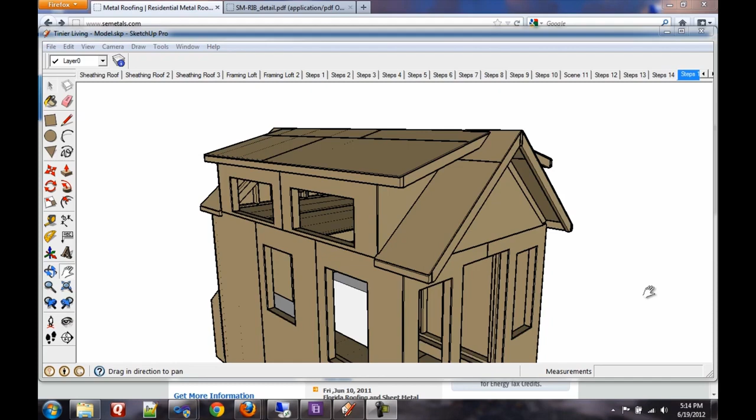I deal with generally two different manufacturers: one down in Florida who has a great online resource, and one up in Atlanta that doesn't really have anything online, just pamphlets they can give me, but I have to go to the store to get those. I'd much rather go to a website and see what I need there. Even though the manufacturer up in Atlanta doesn't provide an online website, I can still use the Florida one, just because things are so similar.

So if you can't find resources for your manufacturer online, I recommend going to one of the websites I use. One of the suppliers I use is Semco Southeastern Metals, at semetals.com. They're a roof supplier, and they have a lot of literature out there on the different products they have. If you click on the literature button on their website, it takes you to a page with all the different pamphlets for all the different products, and there are several different types of panels they sell that have different profiles.

Since I'm not going to be actually buying their product, I found the profile of a product they sell that's extremely similar to what I'll be buying, called the SM Rib Detail Manual. This manual has a bunch of great information, and one of the things I like best is they've got an illustration of a house showing all the different components, where they fit into the roof, and the names of them. Having this information and mapping this model to your house, you can really find out what pieces you're going to need, and it'll allow you to be a little more educated when you go to order your roof from your manufacturer.

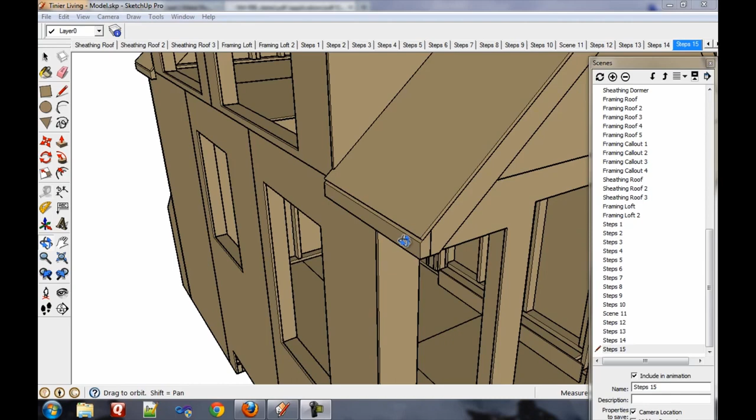Now, the first piece of the roof that we're going to need to install and order is what's called drip edge. Drip edge goes along the bottom edge of your roof, and what it does is protect the fascia board. As water runs down and comes off the panel, you don't want that water running down your fascia board. If the fascia board stays wet, it may start to rot, and it'll definitely start to look bad as it gets dark and moldy. So the drip edge covers that up, and at the bottom of the drip edge it has a little lip. Here's an illustration - number one, we've got the drip edge going along the bottom edge of your roof.

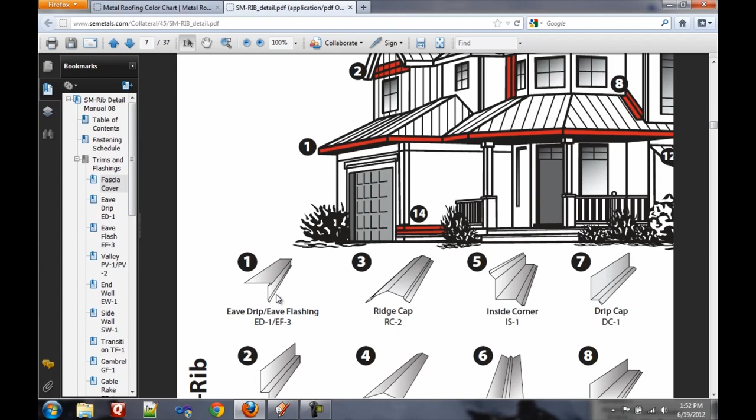You can see here it's got a little bit of a lip at the bottom, so as the water runs down, where it's not running on your fascia board, as it comes off that piece there's a little bit of a kick out, and that water gets kicked out and falls safely away from the fascia board. So a lot of the water will miss the fascia board.

If we scroll down and look at the actual profile of the piece, this profile is for the fascia cover piece. But this picture is a little bit better than the picture for the actual drip edge. You can see here we've got a little bit of a kick out, and then it also has a little bit of a ledge up here.

Now, this is not the same between different manufacturers, you may get a different profile. From the company that I order from, I don't get this little bit of a ledge. But this is the one I'm more concerned about, because the roof panels are going to hang over this, not end directly at the end of the drip edge. So I don't feel like this little lip is as important, since the panels themselves will provide that for you. But this other lip obviously is important.

Another thing to be aware of when you order this: if we look back here, you can see there's an angle. This part is perpendicular to the ground, but this piece of the drip edge mimics the angle of the roof. So when you order this, you really need to specify what angle you want it spread at - this is not a 90 degree angle. If you order it without specifying, very likely you're going to get a piece that they just bend to 90 degrees.

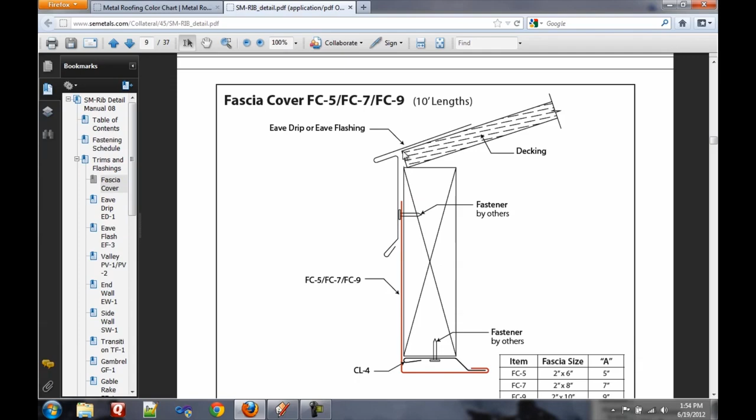Now you can bend this wider once you get it - it's fairly thin metal, but because this piece isn't very big, just a couple inches by a couple inches, it doesn't bend very easily. What I've done is put it in place, then push down on it, and by pushing down you'll start to spread it open. Then you can nail it down quickly and it'll hold in place, especially once you get the panels on. But it's kind of a pain to work with if it's not at the angle you need. So you'll definitely want to specify an angle if you can.

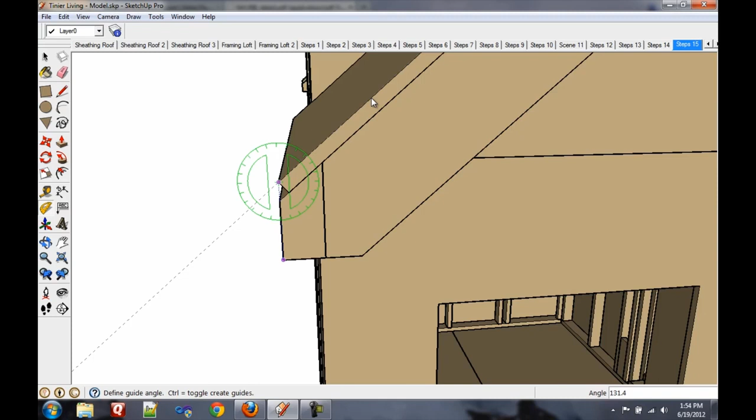In this particular example, if I look at this roof - you can do this once the house is built, take a speed square and do the measurement, or if you have the plans, you can do it this way. I'm going to take the angle measurement... and at the bottom right there, you may not be able to see it, but it's 131 degrees. So I would order these pieces to be 131 degrees.

Now, because of this roof design, I actually have two different angles. I've got an angle up here - this roof is not as steep, and that measurement is 105 degrees. So the pieces I'd order for up here would be 105 degrees, and the pieces down here would be 130 degrees approximately.

Now this section right here is 2 foot, but I also want a little bit of extra material to play around with, because I'm going to bend it around the side. I'm going to cut it, and when we get to the installation you'll see what I mean. So I don't want to order just for a 2 foot piece - whenever there's an end, I want to order a little bit extra so I can wrap it around, about 3 inches on either side.

So this section right here I'd order as a 2.5 foot section, and I've got 4 of these, so that works out to 10 feet. The trim pieces come in 10 foot sections, which works out really well - I only have to order 1 piece. Now be aware these trim pieces are pretty inexpensive - I think a 10 foot trim piece of drip edge cost me about $2.50. So it may be a little wasteful to order an extra piece, you may end up throwing some of it away, but this is the very first piece.

You cannot proceed without putting the drip edge on, because everything goes on top of that. So if you were to only order 1 piece and you made a mistake, especially since it's the first piece you'll be installing, the first time you'll be playing with metal, you may make a mistake, and then the entire roof job will be halted. So for the $2.50, you may consider ordering an extra piece. Just be aware that you may just end up just throwing it away.

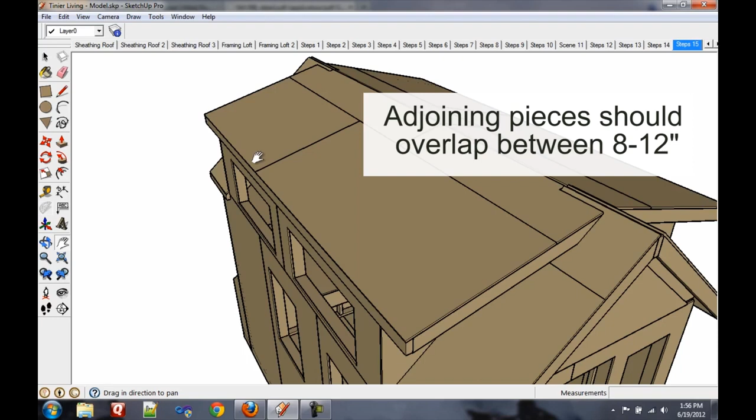Now, if for this section, this is a 12 foot span, so a 10 foot piece isn't going to cover it. So I need 10 feet and then a 2 foot piece. But on this side, I need the same thing. So what I can do is just order 2 10 foot pieces and then a third 10 foot piece that I'll share between both sides. So I'll need a total of 3 10 foot pieces with 105 degrees. And I've got a little bit of playroom there, it's not super tight on the amount that I'm using.

But for this, since it's just the right amount, I would go ahead and order 2 10 foot lengths at 131 degrees.

Now the next part that we'll be installing are the roof panels themselves. Now the roof panels go over the drip edge, but almost every other piece in the roof goes on top of the roof panels. As you can see in my design, I actually need 2 different sized panels. I need a longer panel for this steeper roof, and then I need a shorter panel for up here.

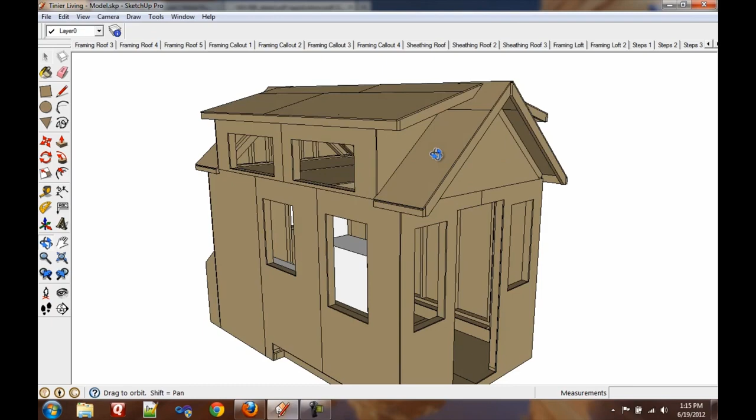Now you should read the specifications for the panels that you're buying, because they usually specify how far over the edge of the roof the panel should extend. So what you'll need to do is decide how long to order the panels. Let's look at this longer panel. If I take my tape measure and go up to almost the peak, and bring down, I've got 5 foot 4 inches that I need to order for this panel.

But then I also have to account for the fascia board, which will be a 1/2 inch, and I also have to account for the fact that they recommend the panel extending 1 inch beyond the edge of the roof. So I'd actually add on 1.5 inches onto this length.

Now, if you're not exact, it doesn't have to be exact to the 1/2 inch, because the ridge cap that you're going to be putting on will extend down the roof, probably 4 to 6 inches on either side of it. So if you're off by an inch, it'll still be covered up, you'll be fine.

But also, if you cut it a little bit too long, if you order it a little bit too long, you can cut it back a little bit. I've done that before, expecting just to be careful, order it a little bit long. But then I was kind of disappointed because I ended up having to cut every one of my pieces, and cutting them across the ridges is a little bit more challenging than cutting it lengthwise, because going over the ridges, it's hard to take snips and cut over the ridges. So I ended up having to take a grinder to grind that off.

So if you look here, here's an illustration of one of the panels. Now these panels are about a little bit over 3 feet wide, and I say over because they actually overlap each other to make a seal. So when they're overlapped, they end up being, as you add on, 3 panels make 9 feet, a little bit over 9 feet, and 2 panels make a little bit over 6 feet. So they're actually just a little bit beyond 3 feet, so that when they're overlapped, they still make a total of 3 feet.

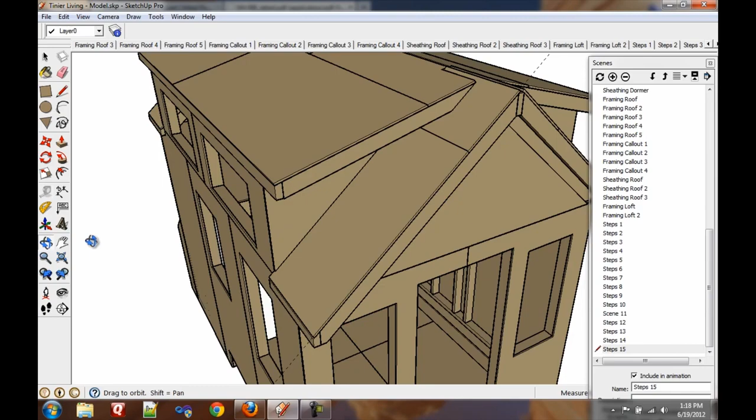It's safe to avoid the seams, so I'd go ahead and spend the money to get 4 different panels, so you can have 4 continuous panels on all these sections if you had a roof like this. Now on this section, I know it's about 12 feet wide, so in that case I would have 4 panels.

Now you're getting pretty close to being right on the edge, and I don't like the idea of not having any room to play. You might end up having to shift these panels over up to 6 inches, and I'll explain why in a bit. But if you have a 12-foot roof and can fit exactly 4 panels, I'd really recommend getting a 5th panel for this section as well, because if you have to shift them, you may not have enough room.

The reason you might have to shift them is, later on, I'll be explaining what Gable rake is. But when you put Gable rake on, let me go back to this display. So this is the profile of the piece. The Gable rake has to make contact in one of these valleys. It can't make contact on one of these hills in the profile of this piece. It has to be in a valley.

So it's easy to line up the first piece, but when you put all the panels together, you have to make sure that when you lined up the first piece, you didn't sabotage yourself to where the Gable rake on the completely opposite end of the roof is now going to lie on one of the hills. I've done that before, where I'll install the first panel, it'll look perfect, I'll make my way down, and then all of a sudden I get to the very other end, and lo and behold, my Gable rake is landing on a hill in this profile.

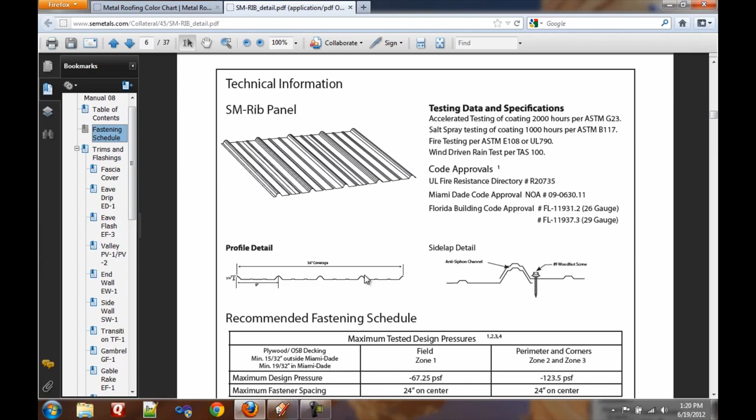And that can't be, it just won't work that way. So I've had to go and take out every one of my panels and shift them by an inch and a half or 2 inches, just so the Gable rake doesn't lie on one of these hills on either end of it.

So once again, for this particular roof, in this design, and obviously your design would be different, I'm going to order a total of 4 of the longer panels, and a total of 10 of these shorter panels.

Now the next part we'll talk about is the Gable rake. The Gable rake is similar to the drip edge we talked about, but this goes along the edge of the roof on a gable end, and it covers up a little bit of the fascia board. Another big difference between the drip edge and the Gable rake is the Gable rake goes on top of the roof material, but it still covers up a little bit of the fascia board, and also has the kick out that allows the drip to drip away from the fascia board.

So here's a profile of a piece of Gable rake, and as I just said, the Gable rake, when it comes in contact with the roof, has to be in a valley. It can't be up here - it will just look really weird if it's pushed up like that. So you have to make sure that on both ends of your wall, the Gable rake is going to fall into a valley.

I can't tell you this enough, because it's a major pain to go back and pull up all this roof. Now as I said, we've got a little bit of a kick out, and because it's on the side, we have to put a screw into it to secure it. You can see here that the roof material doesn't actually go to the end - there's a little bit of a pocket in here, and we're going to put some butyl sealant tape on here, and I'll talk about that in a little while.

So this will be protected. You've got it secured down at the bottom, and you've got it over a valley. You've got the tape here, but even if you didn't have the tape, assuming there's a hump here, the water would very unlikely get in here. So this area is pretty protected, and you have a little bit of room to shift it.

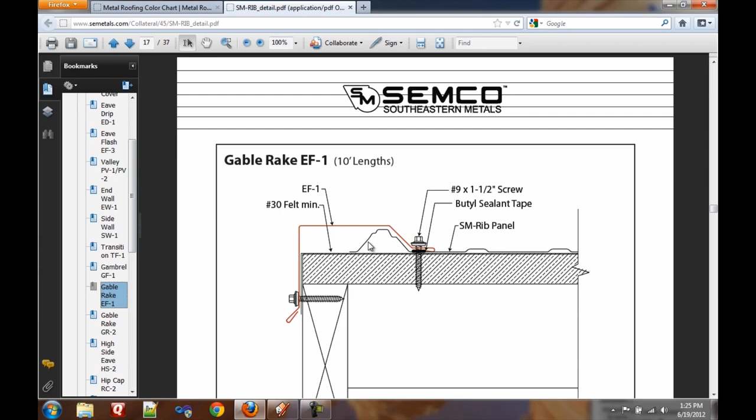It doesn't have to come right up to the edge. So let's go back to the model. To measure this, I would just take a tape measure and go from the peak down, and that's approximately 5'4".

That's the same length as the roof panel. Now, when you cut this, you're going to cut it straight down to make it even, to line it up with the fascia board. So it actually has to be a little bit longer than the length of the panels. This one's going to be cut straight down, so this is a shorter cut. This one is shortening the length of the material, but this one is actually extending beyond the 5'4". So for this, I'd recommend adding about 4 inches.

So that's 5'8". Now these panels, all these trim pieces usually come in 10-foot sections. This one's kind of a difficult one because for this particular section of wall, I need to order 4 different pieces, and there's going to be quite a bit of waste here.

Now I have these other ones, and this is 4'7". So I could probably go ahead and use a single piece, about 1/2 of the piece, or a little bit more than 1/2, for this piece of gable rake, and then the remaining section for this piece of gable rake.

Once again, you could piece pieces together, but you're going to have a seam, and I would prefer, especially on this piece of material, not to have a seam. I prefer to reduce seams all over the place.

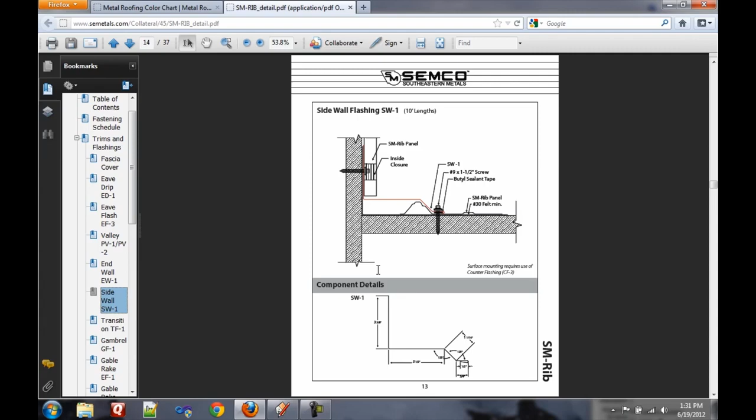And then you've got your siding that covers the metal. So as water runs down the siding, it comes into this valley, and then it runs down the bottom of your roof. Let's look at it on this picture. We can see number 8, sidewall flashing. The metal goes up the wall and then across the roof. Here's an image of it right here.

And it would go right along here, as I said before, goes right along the roof and the wall. This piece isn't going to be able to make it all the way up to the top of the roof because we've got this overhang here. But I want to try to get it up as far as possible.

Now there's going to be a piece of wood up underneath here. So what I'm seeing here, I'm looking farther up than when the house is built, how far I'll be able to look up. So for the measurement of this piece, I would probably just go ahead and order the same amount. We knew that this, let's measure this again.

We know that this is 5'4". The piece of metal is not going to be able to go all the way up to the roof, and it's not going to be necessary because you've got this overhang here that's going to be hiding the upper portion of it. So I think about 5 feet would be more than enough. I don't think we're even going to use that.

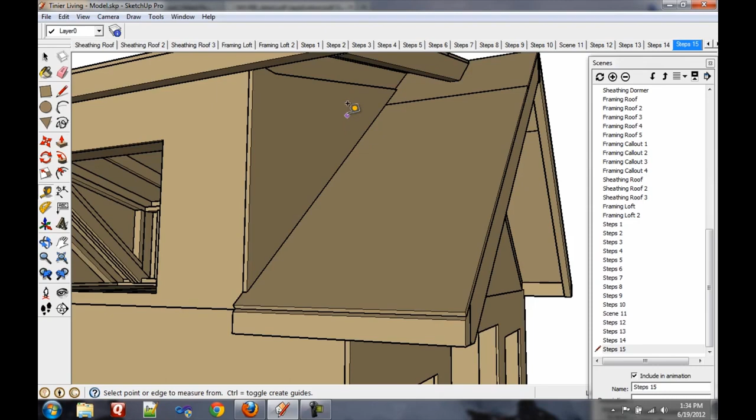But given that the pieces come in 10-foot lengths, I would go ahead and order 2 lengths of the sidewall flashing. And that would be 5 foot for this section and all 4 of these, 5 feet for all 4 of these, the ends of the dormers.

The next piece is the ridge cap. Now the ridge cap is generally pretty simple. Once again, for this particular roof design, it's a little bit more complex. This trailer is 12 feet long, and I've got a 1 foot overhang on each end, so it's 14 feet.

So if the roof was just a standard roof, I could get away with just ordering 2 pieces, and I would just have a seam somewhere in the middle. I would, you could just run the 10-foot length. I'd probably have about a 1 foot overlap here on the roof, and I would double tape that, and we'll get to the tape in a second.

And then you'd have a 10-foot section and then a 5-foot section, or you could just cross it over in the middle. If you're going to throw the pieces away anyways, you could just run the 10-foot section and the 10-foot section, and you would just have a double ridge cap also.

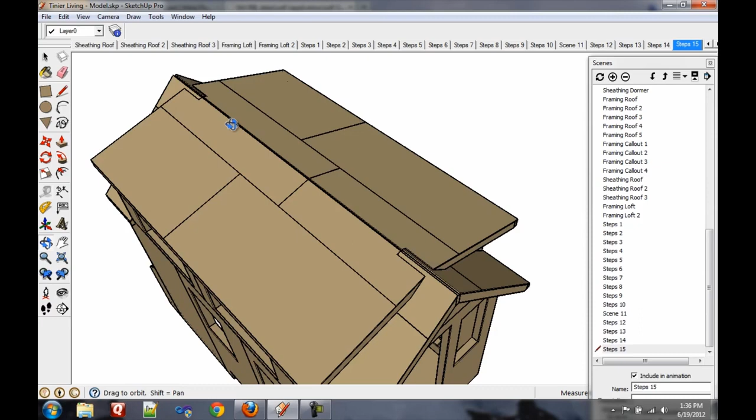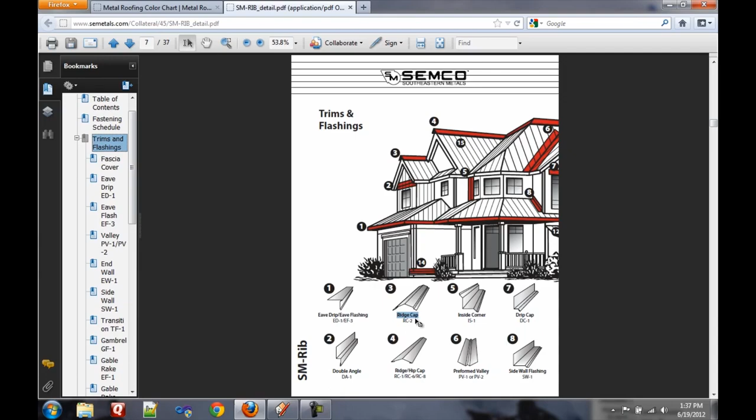Now because of this particular roof design, I've got a change in the pitch of the ridge cap. So let's look at the profile of the ridge cap. Ridge cap is number 3 on this particular diagram. It goes along the ridge, and we can see, now here they have actually 2 different ridge caps. So this is, you can find this within the manufacturer, and then also different manufacturers have different profiles.

This particular ridge cap has a little bit of a kick up. So we've got this seam here that we can screw into, and then it kicks up and it kind of gets a little bit elevated over the ridge. And this one is just a flat piece.

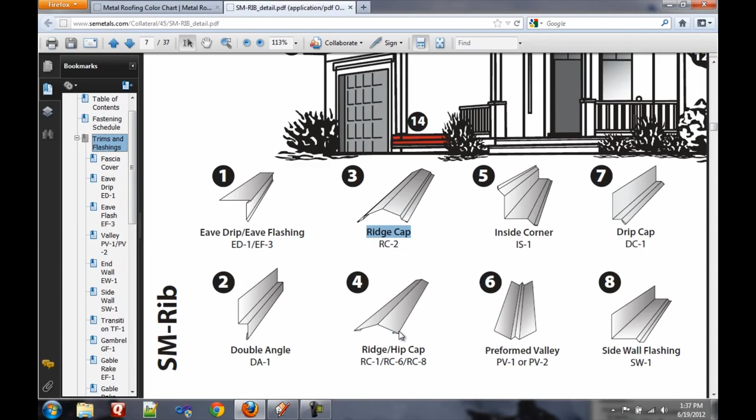Now I personally like this piece. I've always ordered this piece. It just has a little bit more finish to me, a finished look. This, it's all one piece, and when you put the screws in, I never felt as good about this piece. So I like to order this piece.

So here's the profile of that piece. And let me show you real quick the profile of this other piece. So this piece is the one that I'm not as fond of. It's just really flat and really understated. And it shows, when I've used it, because it's so flat, it shows wrinkles.

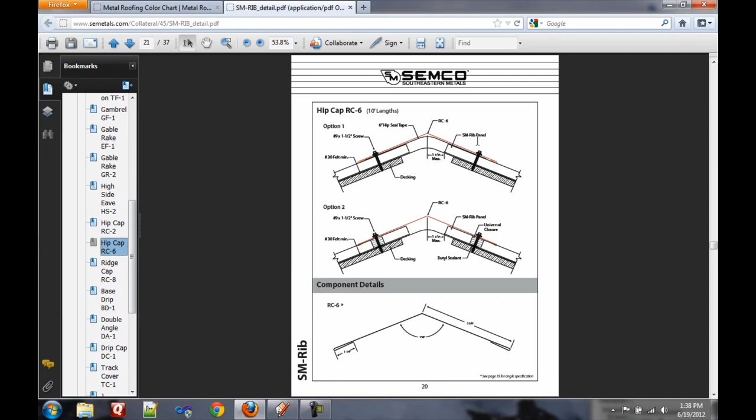So as you put the screws in, as you tighten those screws in, you flex the steel a little bit. And when it's just all flat like this, it really shows that to me. Now if you look at this piece, this is the profile. Let me zoom in. This is the profile of the piece that has the kick up.

I call it what I call a kick up. And I just like that better. As you tighten down on these little flanges that they put on here, this angle here reinforces it, and so you just don't see any of these variations up in this part. So as I said, it's completely personal preference, but this is the one I like.

Now you can see how far down this comes on the roof. So even here they show a 1.5 inch maximum. So if you're, as I said earlier, you don't have to be exactly where the roof panels touch each other.

That can be kind of difficult to work with, and they're saying you can have up to 1.5 inches. I'd prefer not to have that much room - 1 inch is probably my comfort level. But this isn't going to be sealed off as well as the end wall, the sidewall flashing and the gable rake, where the contact is made in a valley.

So we'll be able to put tape here. But on these pieces, this is lying on top of the ridges of the panel, so you can't just run tape across that because it's not making a continuous seam. Instead, we're going to put in closures. Here's a universal closure, it's listed here, and I'll talk about those in a second. But those are just pieces of foam, so they won't have as good of a seal, and I prefer not to have as big of a gap here.

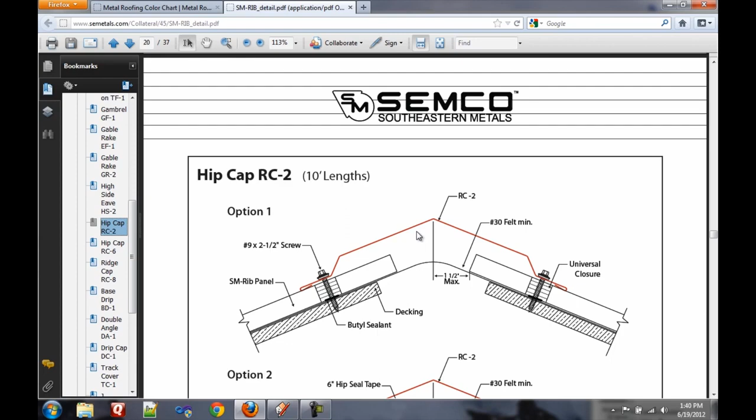Going back to this model, because I've got a different angle - this particular piece is so easy to bend that you don't really specify an angle for it like you do with the drip edge. It's very big, so you have a lot of torque on it when you start to push down on the ends. So they just give it to you as is, and you can easily make adjustments.

Now because this has a different angle, I'll be using one piece up here and smaller pieces for these two ends. I don't want there to be a crack between these two - I don't want this section to end right here and the top piece to end right here, because that would create a little bit of a crack where water could get in, right at that one edge.

So what I do is add another little piece of metal that I'll hammer into place, which will be hidden by the ridge cap. I'll take a little section of ridge cap and hammer it down to fit the contours of these two sections of the roof, then install the small section of ridge here, and the larger section of ridge here.

So I need a 12-foot section, two 1-foot sections, and another 1.5-foot section on each side. That's 1.5 plus 1.5 is 3, 1 plus 1 is 2, so that's 5, and then 12. So I can get away with ordering two 10-foot lengths - I'll just have to do a little more work because of this design. I'll need two of those.

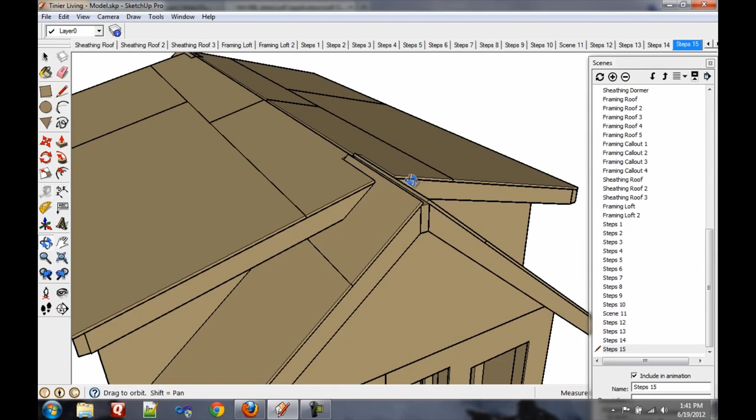Now the last piece we're going to order is the end wall flashing, and that's going to cover the transition between the wall and roof on this end. Let me show you the diagram - here number 10 is end wall flashing, and you see a roof, then the wall, it goes up the wall and then comes down the metal roof.

And this part that goes up the wall, just like with the sidewall flashing, is going to go underneath your siding. So as water runs down your siding, it's going to hit this little valley here, the little piece of metal, and then transition onto your roof. This will prevent water from running down the wall and getting underneath the roof on the back end, and then running down underneath the roof.

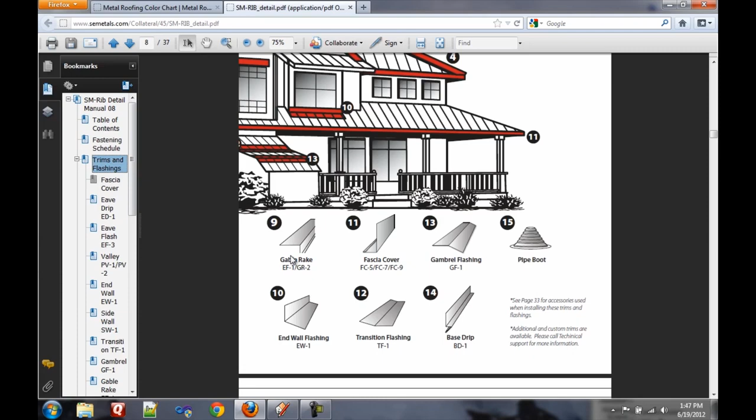So this is only going to be used here, and we only need one piece. This is less than 8 feet wide, just a little bit less than 8 feet wide, so a 10-foot piece will cover this entire house.

Now lastly, you're going to need some accessory items. These include screws, seal tape, closures both inside and out - I'll get to that in a second - and caulk. The screws are special because first off, they have a color matched head, so it matches whatever color you pick for your panel. It's kind of nice because it blends in a little bit.

But more importantly, it has a special ring of sealant around the head of the screw, so as you tighten it down, it self-seals the hole you've pre-drilled wherever the screw is going. So you don't have to worry about that little hole and water getting down in there. Those are really nice.

Now screws come in different sizes, and most of them are going to be down in the valleys. So you're going to be screwing down in the valleys of each of your panels, and then when you attach a piece of trim, that's also going to be down in the valley. But on the ridge vent, there's going to be a ridge cap, and those are actually up on the peaks of the panel.

So you have the option to install, and I've done it both ways, where you can use a 1.5-inch screw consistently throughout all of your screwing, or you could use a smaller screw in the valleys and a longer screw when you're doing the ridge cap. But you can just buy, I usually just buy the 1.5-inch color match screws.

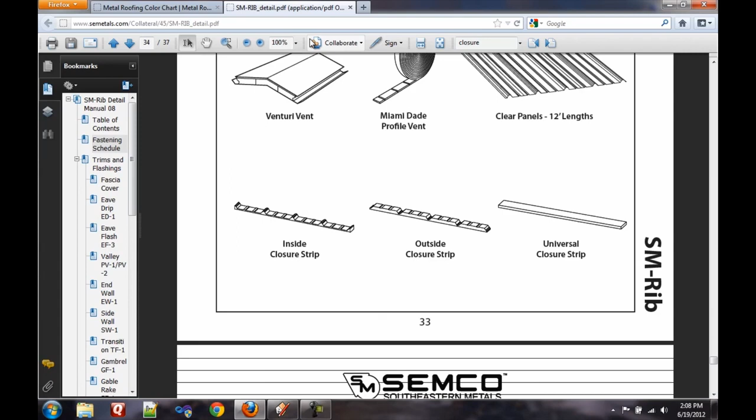And lastly, we have the closures. Let's see if we can zoom in on an image of a closure. These are pieces of foam, and some of them have an adhesive on the back and some don't. There's inside closures and outside closures, and what these do is match the profile of the panel.

So on the bottom of the panel, where it's mostly flat with the surface and then raises up for the peaks, this goes underneath right along the bottom. What that does is prevent wind from coming in and getting up underneath your panel and forcing water up in there, so when it rains, water's less likely to slide back underneath your panel. This goes underneath your panel on top of the drip edge, since the drip edge comes up on the roof about 2 inches, so this fits right in that little space.

And then this is for the top of the panel. This matches so if you were to put this piece on top of this, it's almost like a mirrored image of it. So this goes on top of the panel, but underneath the ridge cap piece. When the ridge cap goes from peak to peak on your panels, there's a hole left in the valleys where water could slide up underneath and go into the crack left when two panels meet at the very peak.

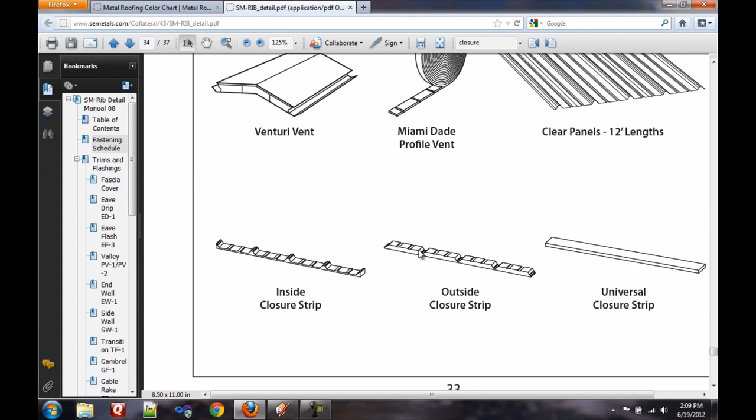So this is to seal that off. These are very important because you don't want water to get blown up into that area, since it could be a sizable hole up there, so you'll want to make sure that you install these.